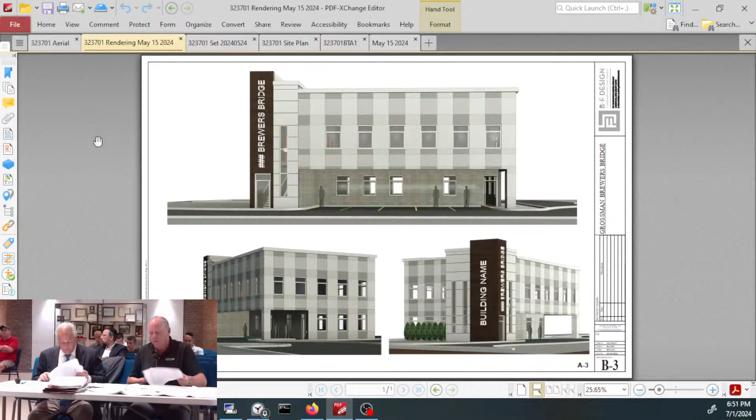That's okay. And then, of course, we also have a letter from Mr. Peters dated June 26th of 2024. He also provides informational comments, summarizes the variances, the existing non-conformances and the ones that are proposed. We don't take any exception to what he has identified in his report. Of course, he points out that the sign is not permitted in the LC zone, which I have discussed.

Mr. Peters does question whether there will or will not be an elevator in the building. As a two-story building of the size proposed, there is no building code requirement for an elevator to be provided, so it is not proposed at this time. Mr. Peters, of course, also talks about the signage requirements, which we've had some discussion on.

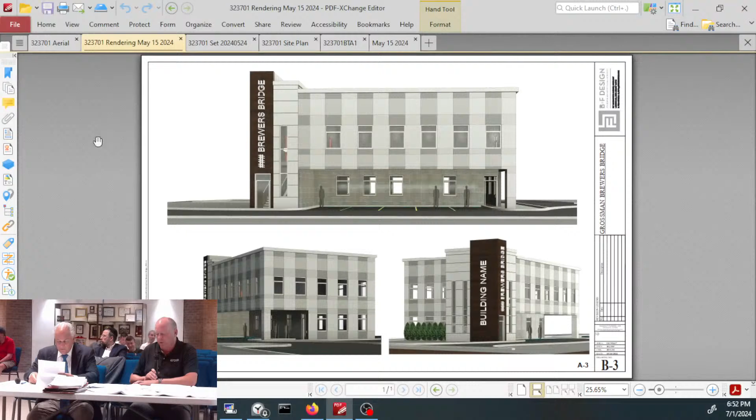He had also asked us to take a look at relocating the accessible parking space closer to the building, and we'll agree to do that. Maybe we can get it to one of those spaces underneath the second floor. If it doesn't impact the building size, we would agree to make that change.

We talked about satisfying the fire department, to limit access to the emergency access lane.

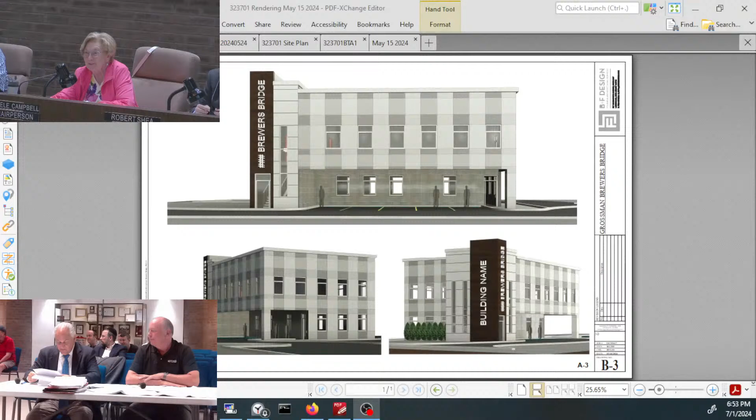Thank you, save you some time. Have a good evening.

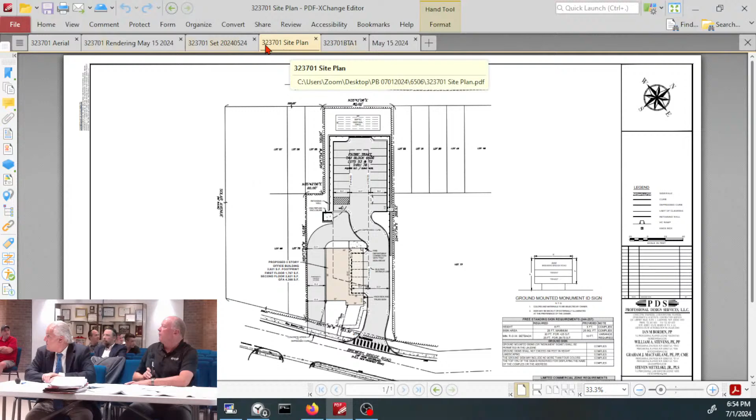I'm sorry, that's okay. If I could get Exhibit A1 up on the screen real quick. The aerial map. There you go. Exhibit A1 we had prepared was an aerial map, and kind of gone out of order, but it shows the location of the site.

Just want to talk about this for one second, because Mr. Peters had asked whether buffering is required along these property lines, because buffering is required by ordinance alongside and rear property lines that abut properties zoned for residential use. All of these surrounding properties are zoned in the same zone, the LC zone. However, when one looks at the zoning map, because these lots are so narrow and so small, the zoning map actually becomes like a big blob, and the color looks frankly like a different zone than the property is actually in. But I'm here testifying that all of the adjacent properties are within this LC zone, so there is no buffering required in accordance with ordinance requirements.

How many lots are you consolidating? I think it is 1, 2, 3, 4, 5, 6. There are 7 lots being consolidated. Into one lot, which again, unfortunately, is still not going to comply with area requirements, but it's the best that, frankly, we can do.

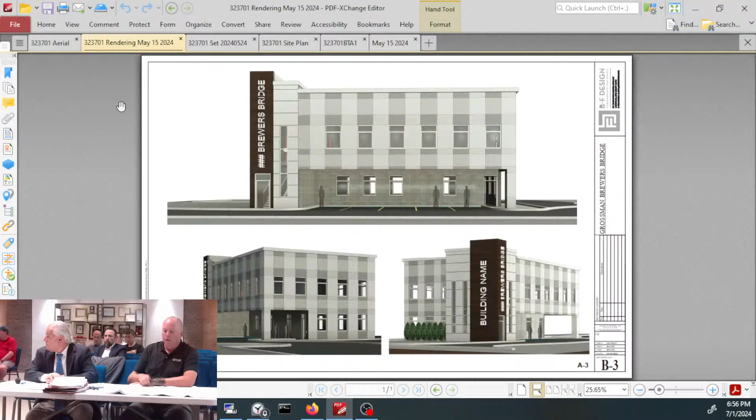My opinion is that having the identification on the building for motorists coming from either direction is helpful. I think it provides clear indication of what the building is and where it is, so in my opinion it makes good sense to have it. Then we do need that relief, just based upon the number of signs, I believe. They will conform to the area requirements in the ordinance.

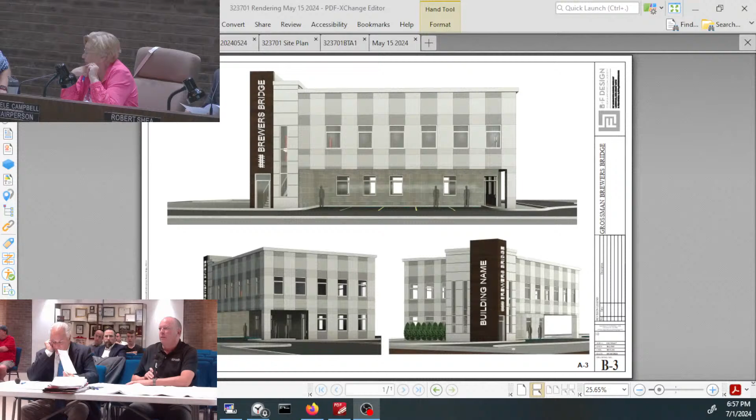Then do you need a ground sign? I mean, it's visible, I think we do, because the ground sign will show the individual tenants, whether the building has 2 or 3 or 4 tenants. The ground signage would indicate ABC company, XYZ company on the particular ground sign. I don't anticipate the individual tenants' names being on the building-mounted signage, they would be on the ground sign.

Mr. Riker, would you be amenable to having the ground sign in the back of the building? That's where you're going to park, that's where you're going to walk in. I agree with you, I do favor the new style of signage on the building, I think it's smart, it's idiot-proof, but I think your customer is better served with that individual tenant sign on the back of the building somewhere. Well, I personally think it's important to have that on the street for motorists who are approaching.

Okay, so we'll work on that one. That's a dot, not a check, but a dot. Well, unfortunately, we don't agree on everything, that's okay, but that's why we're here. It talking just seems like overkill to have 3 signs. It's an awful lot, it's such a small lot anyway. Okay, it just seems overkill.

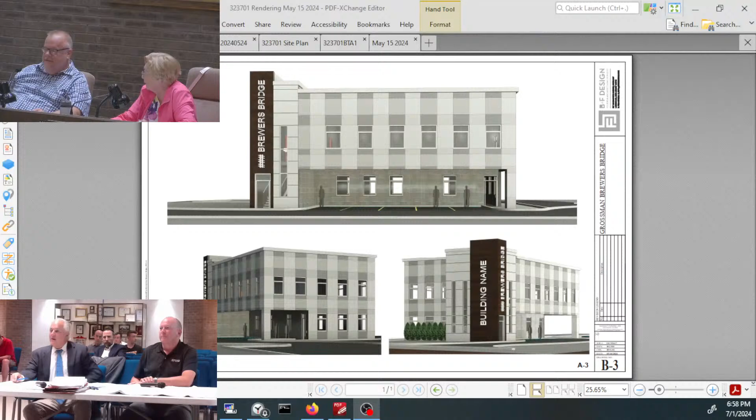So the big site, if you recall the project down on the corner where the jug handle is, we worked on that building. That building was presented to the board without an elevator.

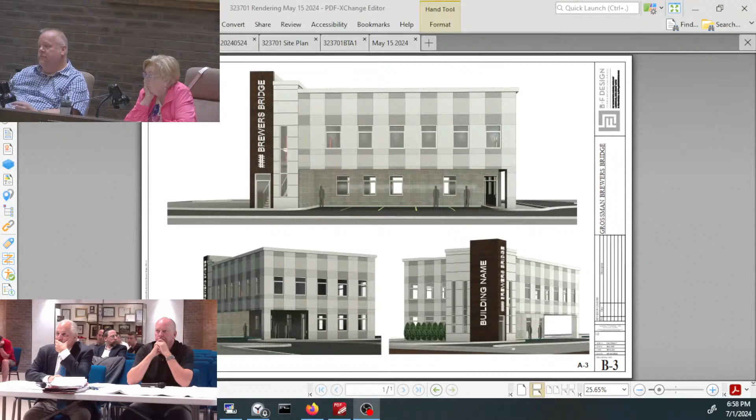If you followed that train of thought, would the applicant be amenable to installing an elevator if the board was to bend a little on the building footprint to allow an external staircase enclosed in clear glass or what have you, so that wouldn't be a detriment to your use? The elevator would be the benefit, and you'd have that auxiliary staircase to be compliant. Seeing that it would be a non-simultaneous use, I don't think it's egregious.

We can discuss that with the applicant. Our position coming in was that we're going to do whatever the building code requires, and obviously it's not required here, but I understand your point. In my opinion, it's a better marketable building for your client, and at the same time, it's fully compliant with ADA. I think my colleagues might bend a little for the non-simultaneous use square footage we've picked up on a few other projects where I've suggested this.

Yeah, it's just a significant expense for a building of this size. It's so small. Well, but it's a benefit as well. All right, when Mr. Kennel comes up to speak, we can speak to our client and cover a few of the questions that have come up so far.

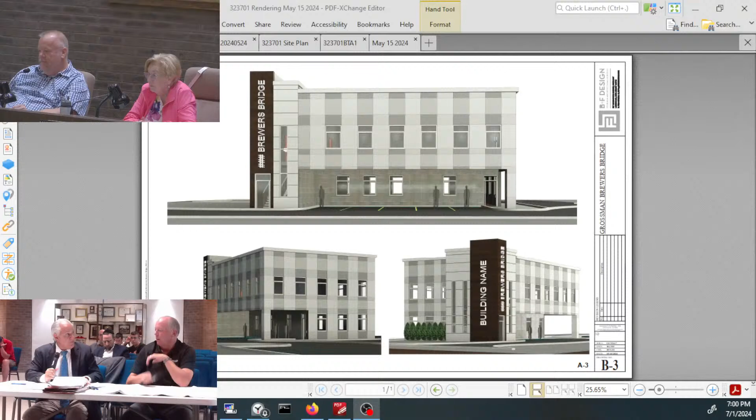Thank you. There are two other reports, Graham, that we need to touch on. Did you finish Ernie's report? I believe I did. There's the fire report from June, and then CME's landscape report.

Yes, and I've already had some discussion about the fire department. We've had a couple rounds with them. They issued a current report, and of course we'll agree to address their comments and also work with them on providing the proper gate to protect or maintain the emergency access lane. And then the CME LTE report - yes, we'll comply with the comments of the tree specialist.

And I know you described the variances and the fact that there's a hardship, but can you finish the planning testimony about whether there's any impact on the master plan or zone plan or any negative impact? If you could, just so we can have a clear record, just put the legal test on the record. Let's identify - we're identifying them as C1, right? Yes, C1 hardship variances. Correct. And then just go right down the line. Let's make the record very clear.

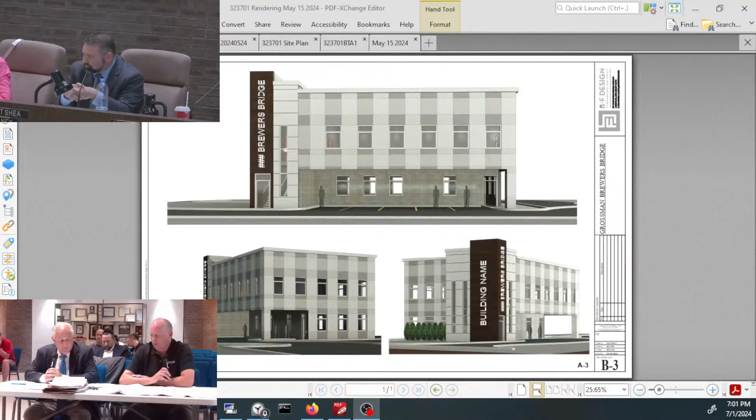So we have non-conformances, which are lot area, lot width, and lot frontage, which all easily satisfy the test as hardships. The client had sent letters to adjoining property owners in an attempt to bring the property more into conformance and did not get any positive feedback. So the lot exists in the configuration that it exists, and that satisfies the grant of the variance for those hardship reasons.

All of the other variances requested for the application relate to the setback of the sign, the front yard setback, the side yard setback, the lot coverage, the parking side setback - all relate to an application that complies with the recommendations of the master plan. It promotes a new commercial rateable, promotes economic development. That point is discussed several times in the master plan. So I think this application satisfies the test for those particular variances.

I don't believe there's any negative impact created by these variances since this project is so small in nature, only 4,400 square feet. You can see by looking at the aerial that there are no adjoining uses that are currently occupied. So none of those variances rise to create any negative impact to any adjoining property owners. I think they each satisfy the test for grant of those variances.

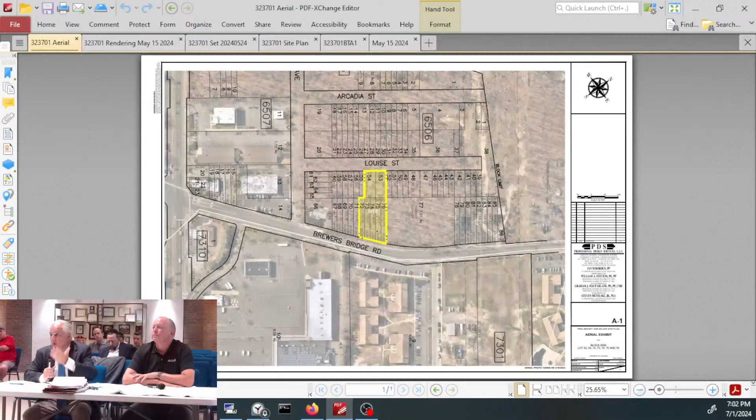Thank you, that's all we have of Graham. I'll ask my usual solar question - the building will be constructed to accommodate solar. But then not install? It's market driven, we'll have to see how things are. But it will be possible to. Correct. Thank you.

Any questions, Mr. Tremer? First, I'll clarify your fire department comment. That area where you are looking to build, their fire truck is upwards of 90,000 pounds. That's why they're requiring it. You're shoehorning a big building into a little spot, and there's barely any turning radius in there. So when you take a truck like that and try to jack it around a corner, we don't need to roll over a $2 million truck. So that's why they're pushing kind of hard, because it's been an oversight that's being corrected at this point. It's not that they're picking on you, it's for the safety of the firefighters and to get proper placement to protect your building. I know it hurts, but everybody's going to be dealing with the same thing in this town from this point on.

The parking underneath the building, is that going to have sprinklers? No. Has that been addressed by the fire department?

Well, they have reviewed the plans we've submitted to date, and they have not commented on that. I did discuss the question of sprinklers with the architect today, and the architect advised me that for a building of this type, the threshold is basically about 9,000 square feet where sprinklers are required. So the information I got was that a sprinkler system is not required for this building of approximately 4,400 square feet.

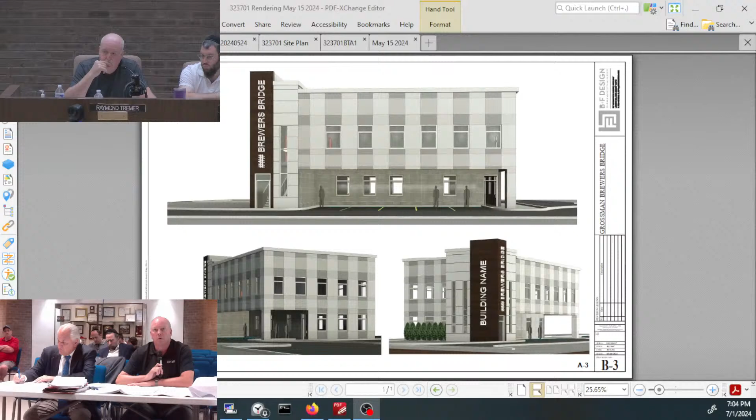I'm not asking if they're required. I mean, you might want to protect your building.

Are you doing any EV parking spots in that area? We have one EV parking space. It's a little further back. We don't have the site plan up there, but it's the first space in the parking area.

Well, I think it's something that should go back to the fire official and let them look at it. It's probably something we'll comply with under the requirements of the building code, whatever those requirements are. The code official, the fire sub-code official, we're fully compliant with the building code requirements. No, I'm not saying you wouldn't. I'm sure you would.

What is the occupancy of this building? I don't have the answer to that question. That is, again, dictated by building code, and this building is going to comply with that criteria.

So how are you calculating your septic system if you don't know the occupancy? That's based upon the square footage of the building. The state code that dictates the design requirements for a septic system bases it on the square footage of the building, not by the number of people or the occupancy as derived by the building code. They're totally different approaches to how things are designed. Septic design is based upon square footage of the building.

Right, but you could actually overwhelm your septic system if you put too many people in there. But does this go to the state or the county for any type of approval? This goes to the Ocean County Health Department for the septic system, and an application has already been submitted.

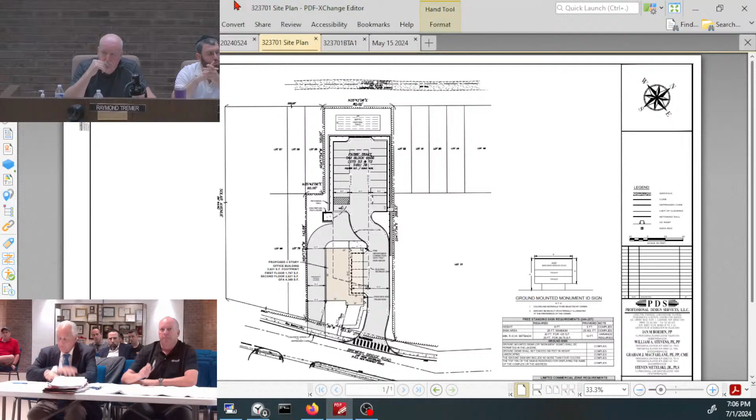Okay, very good. Chair, I have a question on another one, sorry. Just want to understand our current sign ordinance, since they're looking for a variance - this is for our planners, our engineer. They're looking for a variance for the sign? If there were no variance applied for on the application, what would the signage look like? Would there be a sign on the building?

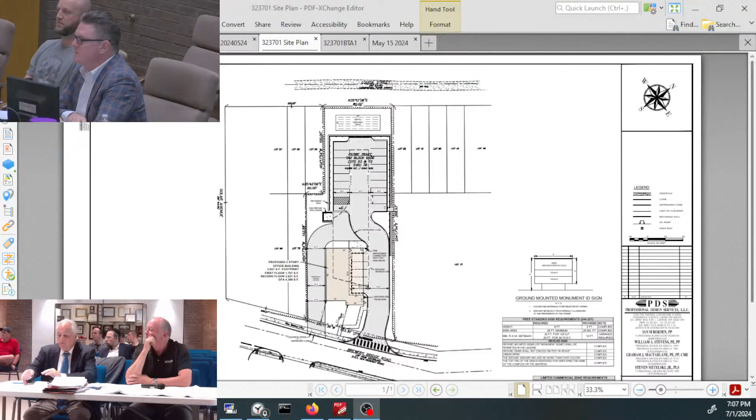The applicant can answer it too, whomever. There's a section of the sign ordinance that indicates ground-mounted or monument signs would not be permitted in this zone, so building-mounted signage would still be permitted.

So where it says hashtag, hashtag, hashtag Brewers Bridge, is that currently permitted? That's what I'm trying to understand. Where it says building name - the ordinance only allows one sign on the building, correct? Correct.

If I could jump in - the facade is allowed to have a certain percentage of signage. Does this exceed the percentage? No, the area will comply with ordinance requirements. It's the number of signs, because the ordinance says each principal building may have one wall sign. We have what we believe are frankly two wall signs, one on the front and one on the side.

So at what point is it a sign or an advertisement? Sign ordinances are designed for identification so folks can see where the building is, which would also be accomplished by having a logo or some other device at the top.

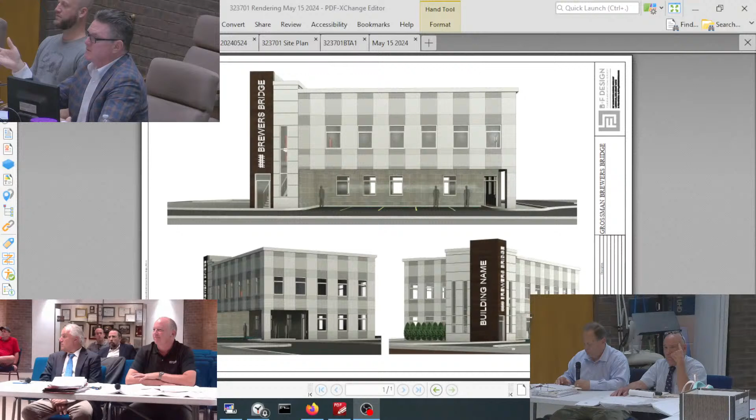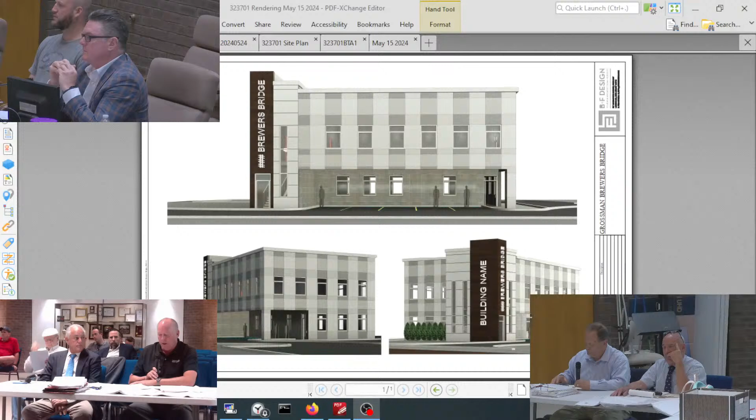It's a percentage of building, a percentage of coverage. Yes, I can respond, and I know Ernie's looking at the ordinance, and he has the citation in his report on page 6, where he quotes the ordinance: each principal building may have one wall sign, not to exceed 15% of the principal facade area or 80 square feet, whichever is smaller.

Your ordinance also has language that limits the number of colors in a sign to no more than 4. So again, that final detail isn't presented. However, we're indicating that we're going to comply with both of those requirements for area and for color. We're asking for relief to have one sign on the front and one sign on the side.

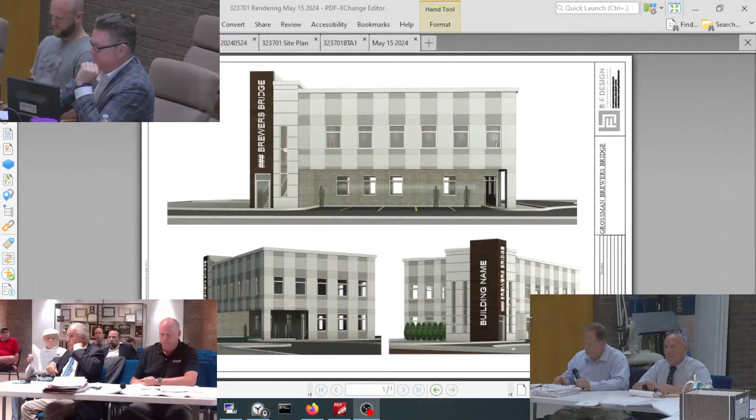Okay. Anyone else from the board? Thank you. We're going to call Mr. Kennel.

Good to see you again. Same here. Do you swear or affirm to tell the truth, the whole truth, and nothing but the truth? I do. Please state your name and spell your last name for the record. Scott Kennel, K-E-N-N-E-L, with McDonough and Rea Associates, located at 1431 Lakewood Road, Manasquan. And your credentials have also previously been accepted by this board? Yes, they have, as a traffic expert, Madam Chair. Thank you.

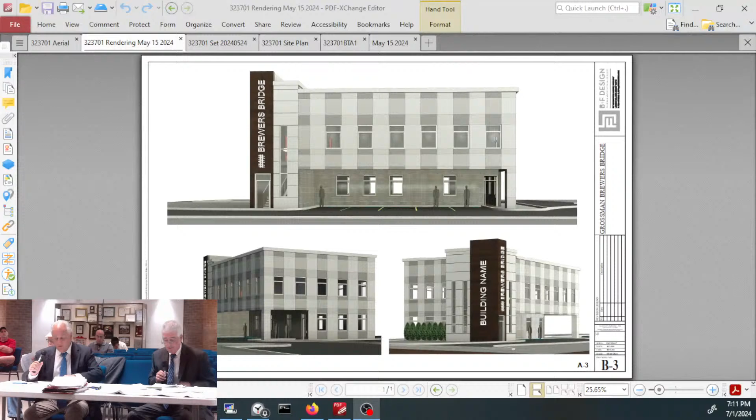Mr. Kennel, your office prepared the traffic and transportation analysis referred to in the reports from January of 2024, which you've since updated. Can you tell the board what you did to prepare that report and what conclusions you reached? This report qualifies as a traffic statement. Given the small size of the building and the small traffic generation, we did not do current traffic counts or a level of service analysis, and that's generally accepted by Ocean County for a development this size.

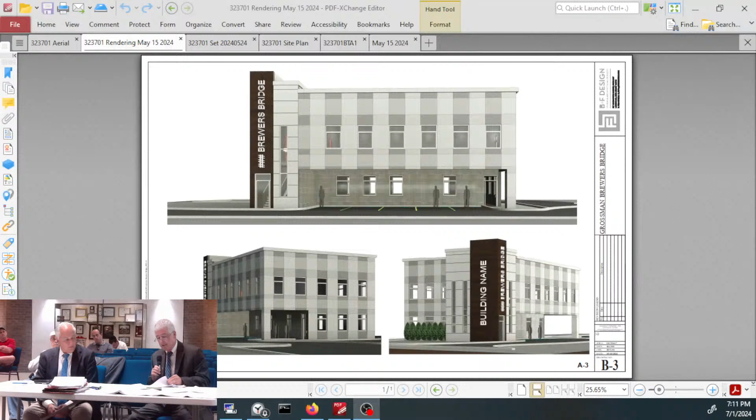But we did review historical traffic data adjacent to the site, for example on Brewers Bridge Road, and that data indicated that the two-way traffic flow along the site frontage is approximately 600 vehicles during the morning peak hour and approximately 1,000 vehicles during the PM peak hour. Brewers Bridge Road in this section is under municipal control and has a posted speed limit of 35 miles per hour.

For the proposed office building, we consulted the Institute of Transportation Engineers trip generation manual for trip rates. For a building of this size, it's projected that during the peak hour, looking at a 60-minute period as in prior testimony, the building would generate approximately 7 to 8 trips during the peak hour, since people are assumed to arrive and depart over a 2 to 3 hour period for this type of use.

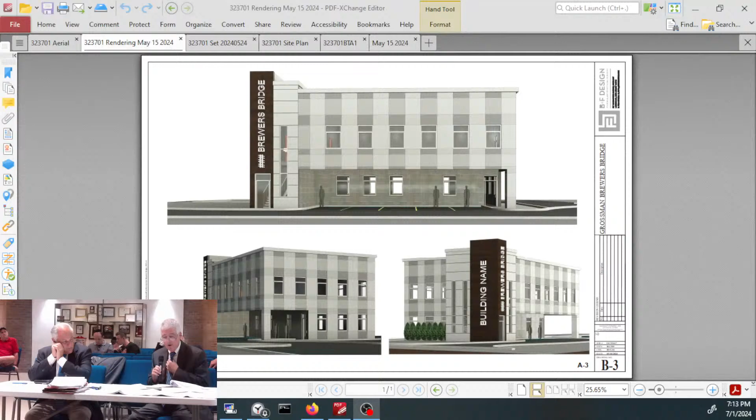As far as site traffic orientation, based on the existing roadway network and existing traffic volume patterns, we expect that basically 50% of the site traffic will be oriented to and from the north, and 50% to and from the south, having access to County Line Road.

Graham had spent some testimony on the site plan, and as he indicated, the parking supply meets and exceeds the township ordinance with 22 spaces, one of those being an EV space.

The other item reviewed was the operational characteristics of the site driveway, relating to sight distance. For Brewers Bridge Road in this area, a sight distance of 305 feet is required, based on the speed limit. Based on my measurements, the critical sight line is to the north, and we have approximately 350 feet, so we meet and exceed what's recommended for stopping sight distance for a private driveway onto Brewers Bridge Road.

As far as circulation, we're providing the emergency access to satisfy the comments from the Fire Bureau. In my opinion, this site, from a circulation standpoint, has been designed and is acceptable to accommodate the passenger vehicles as well as the large wheelbase vehicles that'll serve the site.

In essence, that completes my direct. And did you come to the conclusion that the driveway itself will operate safely and efficiently? That is correct.

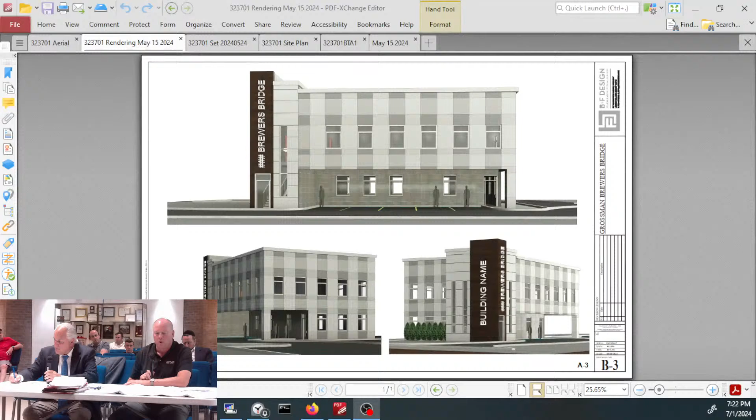The board asked about the interest in providing an elevator. My client is not excited about providing an elevator for the building. His opinion is that for a professional office, it really is not warranted. If it was medical office, it would certainly be more warranted for that type of use. But for the professional office, as defined by your ordinance, excluding the medical component, he does not feel that there's enough of a benefit to construct the elevator with this application.

And the signage question? The signage question, frankly, we didn't get to. I think the question was related to the ground sign, whether you would be comfortable not having the ground sign in front of the building and move it to the back of the site just as a directory sign instead. My opinion was that the ground sign is advantageous for identification, and some board members had a little different opinions, so we're trying to sort that out.

I mean, the address should suffice. So people are looking for an address, they're going to the address. The applicant would agree to eliminate the freestanding sign and put a directory sign behind the building. And in consideration for that, we would request the variance relief for the second facade sign. Sign would be in the rear.

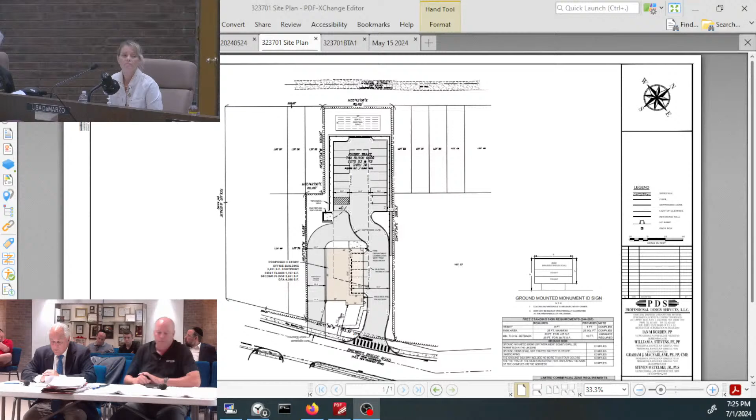One of the things keeping this building from being compliant is that we've added that fire safety driveway, which takes up a considerable amount of impervious coverage. Correct. All right, that helps the board see the issue. Thank you.

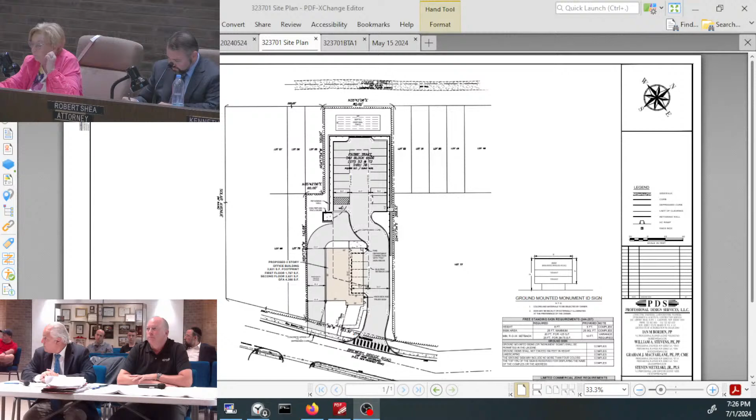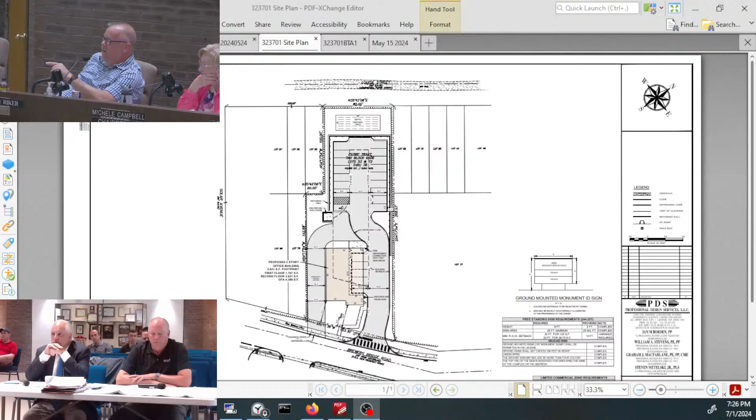Mr. Riker: So to sum it up, your applicant is willing to spend several hundred thousand dollars on another lot, but not put a 6 by 10 or an 8 by 10 addition on the outside of the building, with the board potentially waiving that additional square footage for an outside staircase. And then looking at the parking, there's no fire suppression under it, and I see you're going to kick the can down the road on fire suppression, but the entry door is in that concealed space. So if you have a fire and want to get out that way, you're going to get burned. That's how I'm looking at this project. You're willing to spend several hundred thousand dollars on a lot, but not willing to do a few other things.

Correct me if I'm wrong, but... Well, just so you understand, that's not the only entry door. I know you see that door on this plan, but there's also a door at the front. Do you get a choice what door you run out of in a fire? Well, it complies with the building code. Well, that's great.

So you're telling me, as a planner, that without fire suppression, having an exit and entry door in a garage space that's non-sprinklered and unprotected is a good idea. Am I missing something, Mr. Tremer? Because when that cooks, it's like a broiler.

Anybody else? Would you like to sum it up for us, please, Mr. Alfieri? Yes, I believe we've...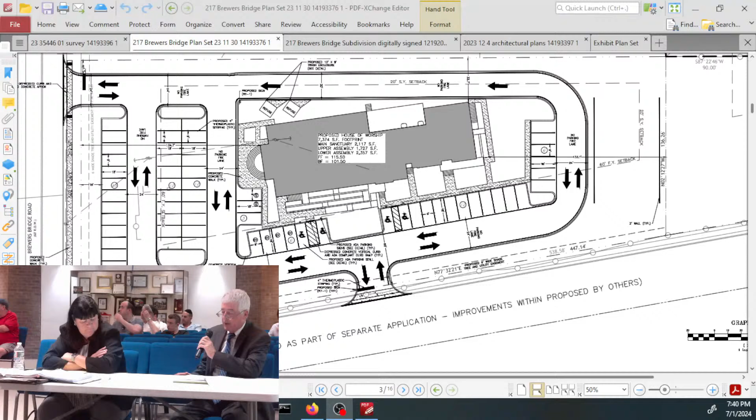This is Exhibit A3. As I mentioned earlier, this site will be served by two access drives: a two-way driveway to Brewers Bridge at the northerly property line, and then a secondary access out to Holden Court. In our analysis, we again considered all traffic entering and exiting via Brewers Bridge Road to provide a conservative analysis.

It was determined that the site driveway would operate at a level of service C for exiting movements onto Brewers Bridge Road, well within acceptable traffic engineering parameters.

In doing that analysis, we also determined the maximum queue, or the 95th percentile queue, which addresses a couple of design waivers we have relative to the driveway throat. Based on the analysis, the 95th percentile queue would be one vehicle, accounting for approximately 20 to 25 feet, where the ordinance recommends 60 feet. My analysis indicates that having a shorter driveway throat will not have a negative impact on the on-site operation, and that the 95th percentile queue is one vehicle. So in my opinion, relief can be granted for the driveway throat length.

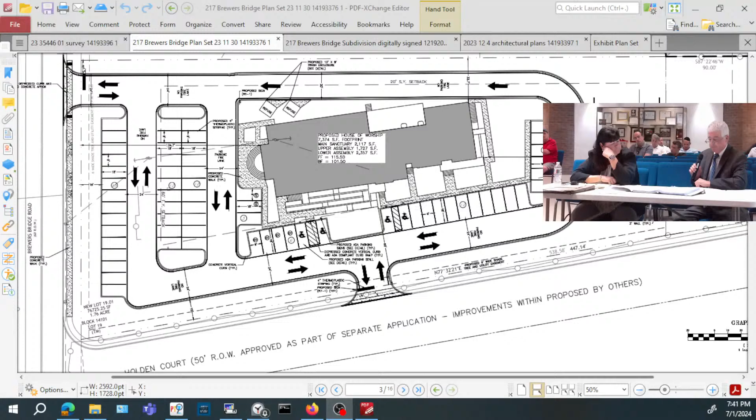As it relates to the site plan, there are two points of access, optimized for not only passenger vehicles but for emergency type vehicles to the site. There are 68 spaces required. We're providing 65 physical spaces, and 6 of those are EV spaces, which with the DCA credit equates to 71 parking spaces. Therefore, we comply with the ordinance based on the 2-for-1 credit allowed by DCA.

The internal aisle widths are 24 feet and can accommodate two-way traffic, as well as large wheelbase vehicles, specifically refuse or emergency vehicles that would have to serve the site. The site driveway on Brewers Bridge Road is located at a point that provides more than adequate sight distance, exceeding recommended standards. In summary, the site plan has been designed to provide parking in compliance with the ordinance, and the site driveway has been designed, in my opinion, to operate efficiently and safely, with minimal impact on the adjacent roadway system.

The direct testimony of Mr. Kennel.

Anyone from the public wishing to ask questions of Mr. Kennel or make reference to his testimony may come forward now.

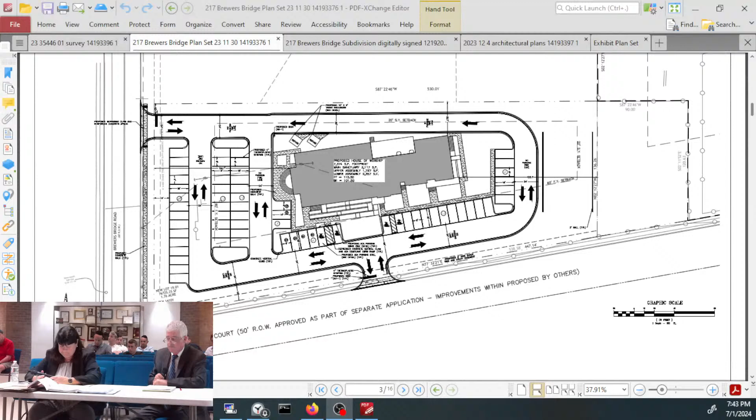Now any public members who wish to comment on this project may come forward. Seeing no members of the general public approach the microphone for general comments on this application and this application only...